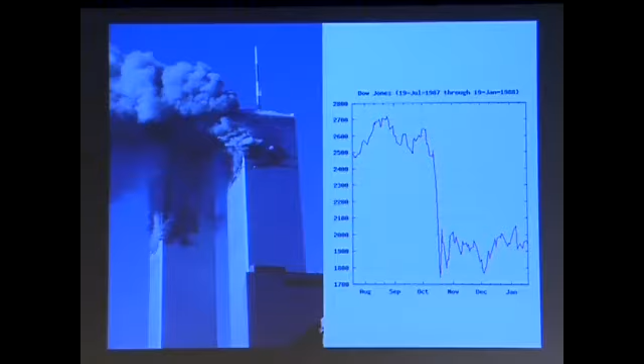Borders, limits, are a new problem that at least my generation was not concerned with, because we were concerned with embodying flows and liquid forms - Yokohama is very much a kind of exploration in that sense.

And there are other reasons why limits are becoming important. The planet - we are realizing that the planet's resources are finite. We know we are walking towards the abyss if we continue consuming the amount of energy we are consuming and producing the carbon emissions we are producing.

Most of these things are resolved, are addressed, in the problem of the envelope of the building. The envelope of the building accounts for a very large percentage of the possibilities you have to regulate the energy exchanges between the outside of the building and the inside of the building.

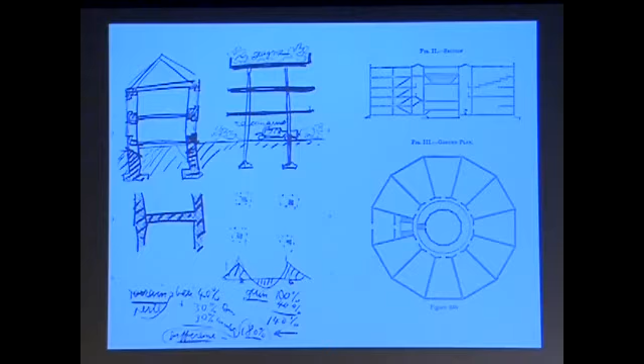I think in the next few years we probably need to bring together theories of representation and technologies of environmental performance into a new theory that can bring those two things together. And as a hypothesis, which is obviously a test, is not a finished theory.

What I am trying to do, and what I'm going to use as the backbone of the explanation of our projects, is the idea of envelopes. There has been, in the last few years, a lot of interest in the field of architecture about the surface as a problem. By talking about the envelope rather than the surface, what I'm trying to do is expand that definition.

I'm not concerned with the patterns of the surface or how to produce the patterns of the surface. I'm not concerned about the surficial effects that we can produce - we know we can produce these things.

I think what is crucial to address is the relationship between those patterns, those systems of construction, and the massing of the buildings, the aspect ratios of the building. So the theory is that we can actually draw links between the aspect ratio of an envelope, and I'm talking again as an envelope as the sum of the facades and the roof.

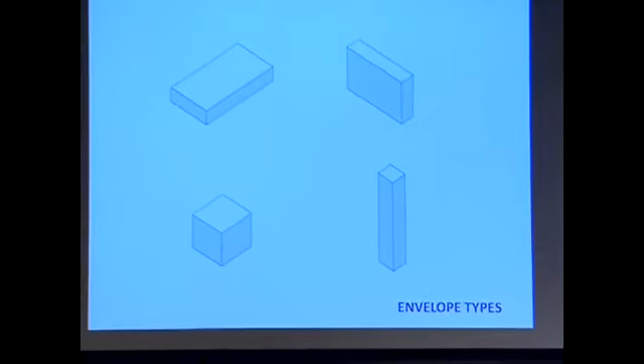So there are four types that I call flat, horizontal, and this is basically my hypothesis, and probably it's an incomplete hypothesis—it needs to be developed, but that's where I start from. There is flat horizontal envelopes, flat vertical envelopes, spherical envelopes, and vertical envelopes. Those are the four basic categories in which I'm trying to structure this theory of the building envelope, which hopefully will bring together surfacial concerns with climatic problems, with representational problems, and hopefully political opportunities.

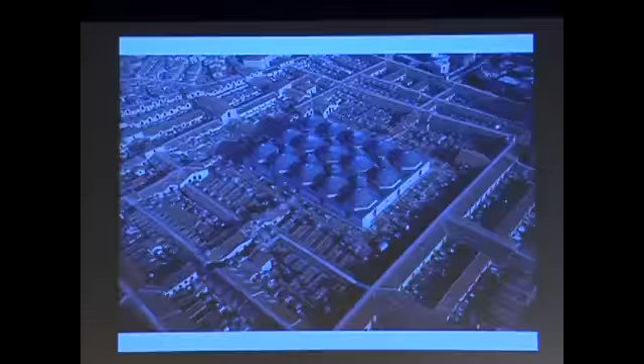So flat horizontal envelopes are envelopes like this one. They are not new in the history of architecture—they have a very long tradition, sometimes utopian. So all these buildings that contain large spaces and that basically cover a large piece of the ground also have certain interesting potentials.

The most important one is that because the roof suddenly becomes the main surface of the envelope, it needs to be articulated in such a way that regulates light and ventilation, and in some ways conditions the interior of the space. It's the roof that becomes the main device to relate outside and inside, natural and artificial.

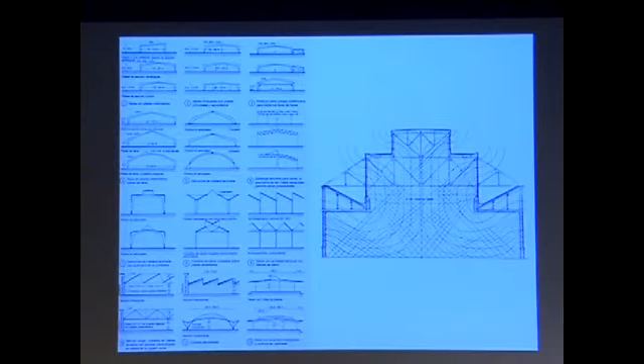What is interesting, as I think, as perhaps a political opportunity, is the fact that these buildings are usually so large that sometimes, or very often—even if in a picturesque manner—they have to decide whether nature is inside or outside.

It's very common. You go to airports, you go to shopping malls, and there is some attempt always to replicate nature inside, by putting bamboo gardens or these kinds of little demonstrations of nature that you find inside of the airport.

So the roof is making the border between the inside and the outside, but it's also making certain statements about the artificial and the natural.

And it gets even more complex when these buildings become so large and the technologies of roofing become also naturalized, that these buildings start behaving as a ground, and therefore open another political potential, which is the manipulation of the ground—the destabilization or restabilization of the ground as a political opportunity.

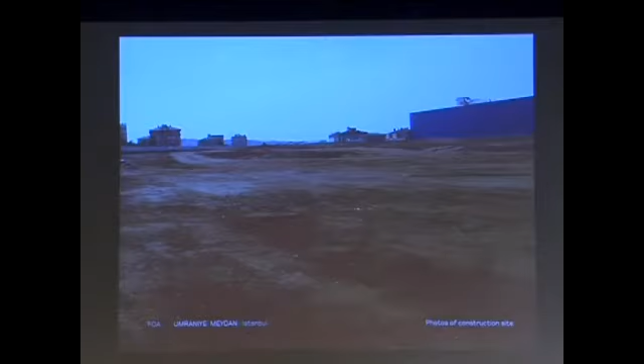What was interesting was to realize that the ground was basically clay, red earth. Then looking at old pictures of Istanbul, we realized that Istanbul is a city of green and red.

Because it's a very green city with this kind of clay ground, if we were trying to challenge the status quo of this deployed box on the land, perhaps one possibility was to use the palette of the ground, to merge the project with the ground in a way IKEA doesn't, and by doing so try to destabilize the ground, to make something new that IKEA doesn't relate to. The ground is irrelevant to them.

So here it was a problem of using the envelope to produce that new ground. We propose a green, super green building.

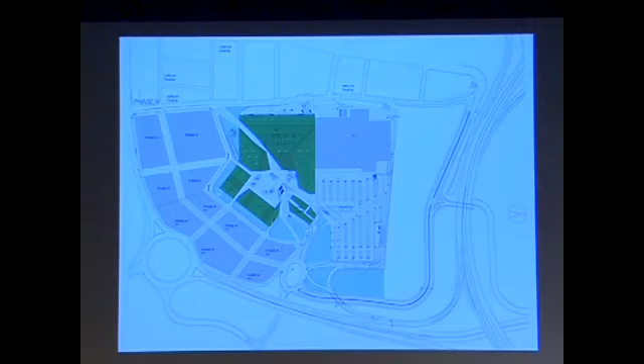We managed to convince the client to split it into pieces and have a central square inside. We use a green roof that has certain advantages in terms of thermal performance and hydraulic cycle and so on.

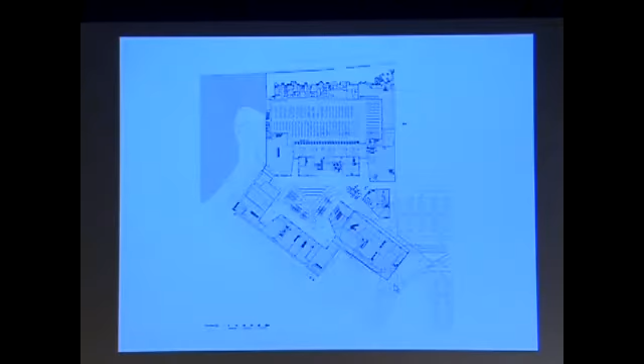The building we developed, as opposed to what IKEA does - this is IKEA, and this is our building. What we did was blend the roof and the ground and locate this central public space that, in the future, once the city grows around this currently suburban location, could become a new square for the community.

So you see the palette of materials - it's a very rough building. We had a minor engagement with the construction, but that was also part of the problem. We had to set up a very simple set of requirements that would have the effect we were trying to achieve without having to be on top of it very much.

These are some of the pictures. It's horribly built, but never mind - most of the ideas are there, even if the details are usually crap.

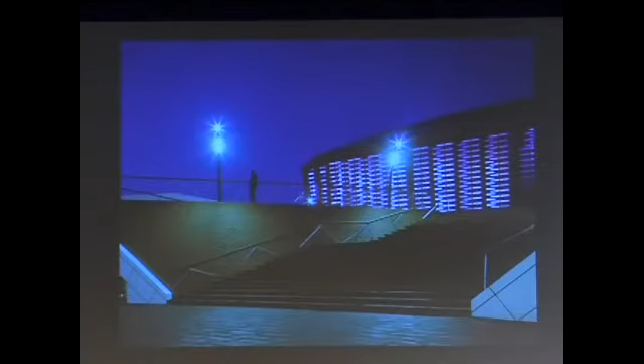I think that's also about talking about cheapness, how to operate with these cheap opportunities that I think constitute today 90% or 95% of the work architects have, and are taken as irrelevant endeavors because they're not expensive, not well considered. I think actually those are the places where we can make important differences.

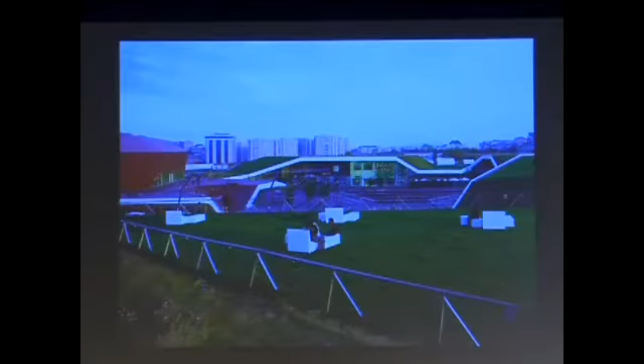Daylight and natural ventilation are used also as a way of shaping the landscape in the roof. You see this is the way the building feels - these people don't know, but they are walking on an unstable ground.

What happens inside the square is quite remarkable because suddenly it becomes a stage for different activities that are organized and supported by the developers.

Second project we are doing now is also a cheap project - the redevelopment of this building, Birmingham New Street Station. Right in the middle of Birmingham is an old building from the 70s that is being revamped now at a huge cost, £390 million.

Our commission - and that's why I say this could be a fantastic project of civic pride and all these things are obviously in the menu - the commission we get is to design the facade, to make some kind of image for a refurbishment actually being done by another architect. So from these 390 million, we have more or less 40 million, and this 40 million is where the image of the building has to be located.

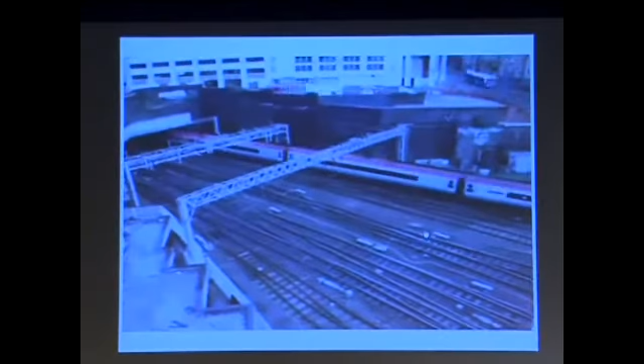It's a time to celebrate the lights, the information lights. So we basically devised this kind of quadriptych of flows happening on the site that we try to capture in this new scheme. The trains, the crowds of commuters going in and out—one of the busiest stations in Europe—the bands of information and the sky.

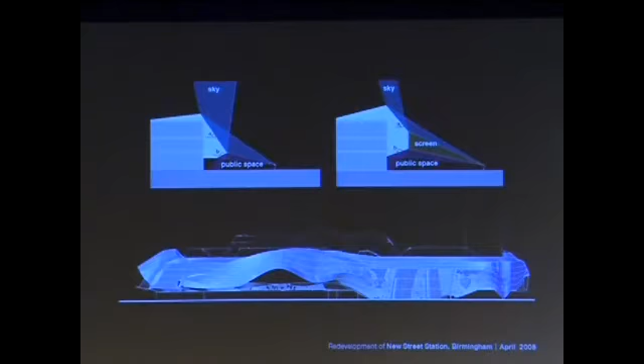And we do that by wrapping the building with a skin that is reflective and designed to reflect exactly those things—not to reflect the buildings in front, like the 70s buildings, but actually to reflect the sky, to reflect the public space, to admit the screens so that the building becomes a demonstration and a mix of all these things. We like to talk about Koyaanisqatsi—the movie where you see cars moving and clouds moving and processes happening simultaneously as a kind of demonstration of the energy of the city.

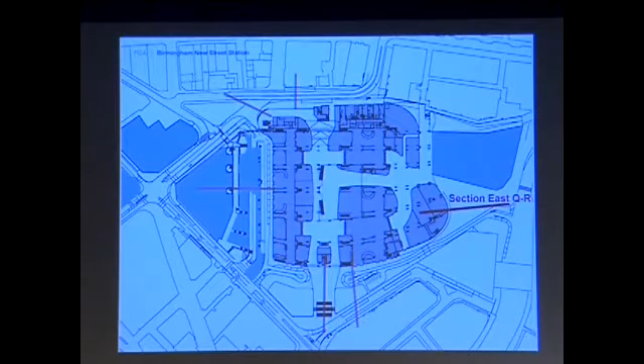So instead of looking inwards from the envelope, we looked outwards. We scanned the field around the station with a series of sections that identify the depth from which the building is seen, and you see what happens. We put the people, the different viewpoints, and we calculate the inclination of those envelopes so that we reflect exactly the things that we wanted to reflect.

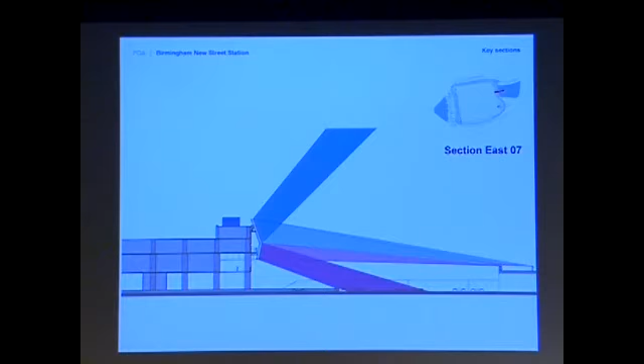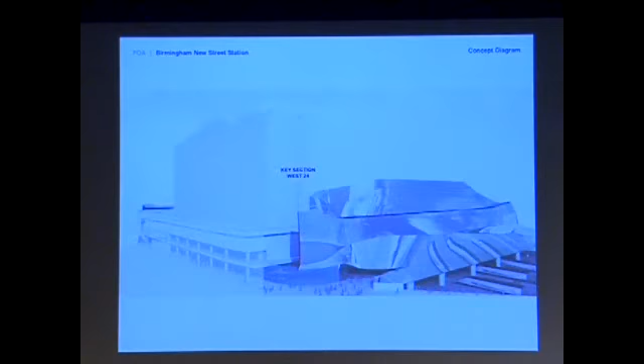So sometimes you have a very deep field, sometimes you have the trains below that you want to reflect, sometimes you have other things, and so with all these sections we just morph them, and that's what created the form of this envelope—one that is supposed to represent the station, and represent maybe Birmingham as a city with this particular past.

But it's all attached to the building. We are not looking inside, we are only looking outside. I think what is interesting about this envelope, and the cheapness in which we have to operate, is precisely that cheapness forces us to invent perhaps an alternative to more conventional types of facades.

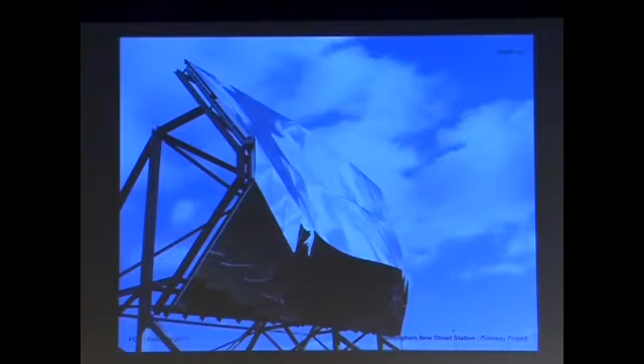This is the way—it's actually a huge thing. These are the mock-ups of the buildings. It's like 19,000 square meters of stainless steel, and this is the effect that we hope the building will have. It will be almost like a device that will enable the citizens to witness and experience the different lighting conditions or the different flows going in and out of the station through the day.

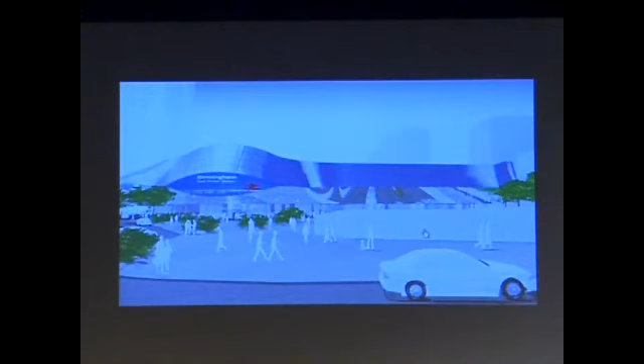Some more images about the building and an animation that tries to explain. You see, from ground level you never see the trains, but it is precisely because the facade is reflecting and pointing down that you see the trains, and you see the commuters moving, and you see the clouds moving, and you have this kind of synthesis of flows in the center of Birmingham.

I'm not going to finish this. Let's move on to the next category, which is the category of spherical buildings, trying to honor an important inspiration in this research, which is Peter Sloterdijk's trilogy of the Spheres, which I'm fortunate enough to be able to read in Spanish.

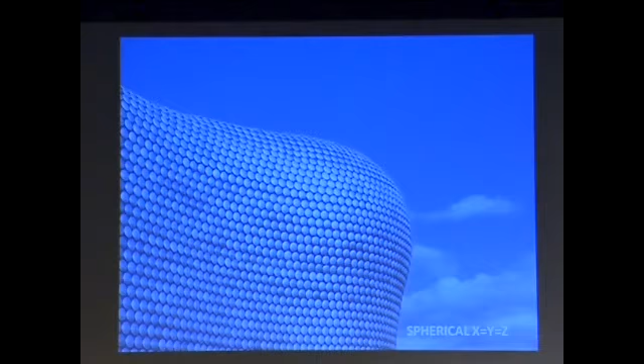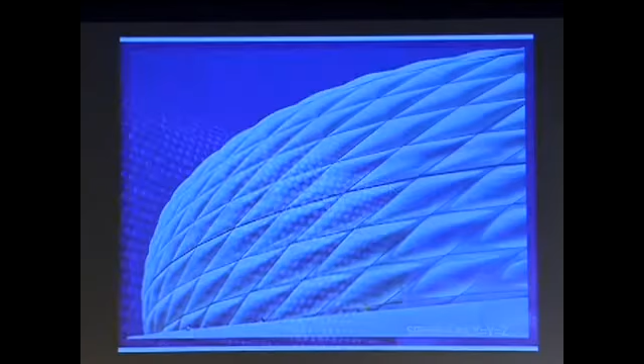So spherical buildings doesn't mean that they are spherical. It means that they have a more or less equidistant or even dimension in all aspects—so the height, the depth, and the width of the building is more or less the same. So this is a spherical building, this is a spherical building, this is a spherical building, whether you believe it or not. This is also a spherical building, in the sense I'm using the term here.

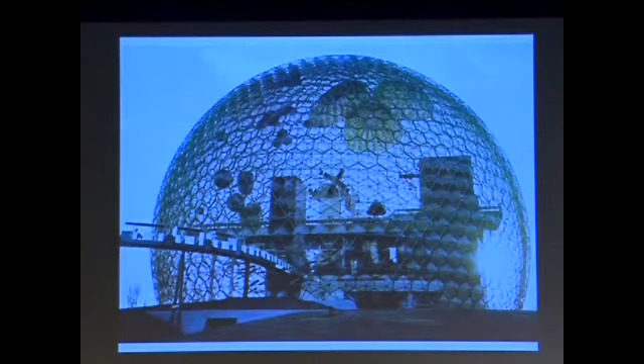And I think spherical buildings have a long tradition of engagement with the representation of political ideas or ideologies, primarily because they are buildings that are difficult to function without air conditioning. They don't ventilate, you cannot light them inside, you need to develop a kind of artificial climate inside, and that's why they became so rare, and they are often used as ways of showing utopias or worlds in themselves. Spherical buildings actually have the lowest envelope ratio of all, because a sphere contains more cubic meters per square meter of surface.

That means that in a way what happens in a building like this is that the facade is freer from any internal determinations than in other typologies, and yet they are buildings that usually have a very important iconographic content. They are public buildings. They are buildings that often mix different types of spaces. Some of them are not related to the outside. Some of them are related to the outside.

So they enable architects, they push architects to engage in a kind of experimentation that is to a degree about pure treatment of the surface. The surface is no longer a crucial climatic device, and therefore it becomes a domain for experimentation. Architects now have all kinds of CNC technologies, silk screening technologies, and casting technologies being explored in this type of buildings.

It's actually quite interesting because this is a kind of sample of all these buildings. What you see in all of them is a deliberate attempt to make differentiated patterns. So there is a certain political unconscious that happens in China, happens in Japan, and happens here in Europe that drives architects to explore this type of patterns.

That's just kind of a side comment. So, two buildings that are not that spherical, but unfortunately we used to have one spherical building, which is the Institute of Legal Medicine, but that stopped. We basically pulled out. That was too cheap to continue.

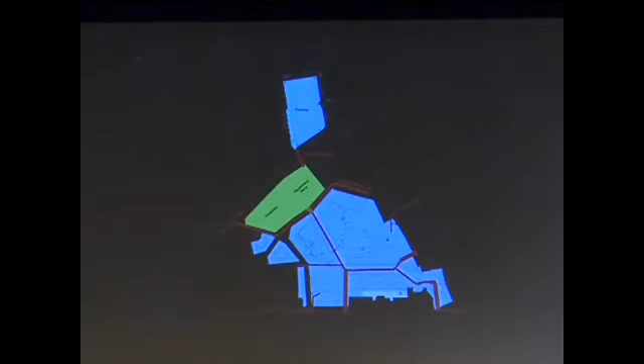So now I'm going to show two facades that are for buildings more or less within that type of envelope that enclose a space that is equidistant in all dimensions. One of them is this building, John Lewis. We had to do that project as part of a development in Leicester.

Nothing to talk about the inside. Again, cheap projects. We aren't even allowed to question how a cinema complex works or how a shopping department store works, because they know better than us how they work. So they tell us what to do, and we are left with the design of the facade as the main area of application of our discipline.

So in that situation, we again try to make that envelope attached to. Attached is a word from Bruno Latour that I like very much, especially in respect to the issue of the envelope, because the surface is by itself, but the envelope is always attached. It's attached to the outside of the building, it's attached to the inside, it's attached to cultural concerns, iconographic concerns, environmental concerns, and so on and so forth.

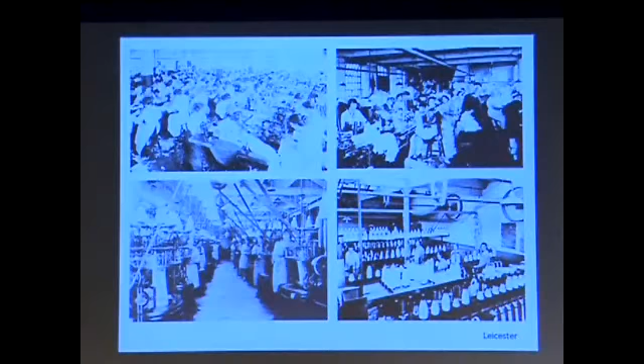So in a way, the project of the envelope is a project of being able to produce or explore expression of these attachments of the surface. In this case, Leicester is an industrial city with a huge Asian population and a tradition of this type of hosiery.

So what we proposed was to capitalize on that tradition and replace the wall of enclosure of the store with this complex skin of two layers of glass. This is actually not cheap.

But we were lucky enough that the client bought it, and so what we did was take a pattern from the archive of John Lewis, who was the final tenant for the building. We selected a pattern based on its coverage because we were interested in a certain amount of G value, shading coefficient of the facade, in order to achieve certain environmental performance. We then redrew it, in a way that by having these 8 different tiles, we can shift the transparency slightly.

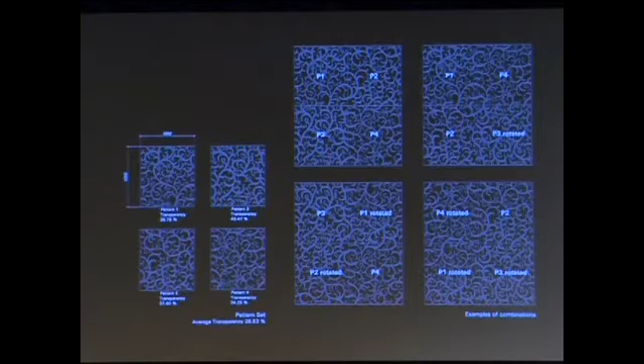So it's a pattern that appears continuous. It's actually discontinuous because there are unitized glazing systems, but by printing that pattern on the glass, we are erasing the joints and turning it into a monolith that has a differentiated pattern. If you think about that political unconscious I was mentioning before, of facades that are at once monolithic and differentiated, like in Beijing, this is part probably of that same attempt of capturing that political unconscious.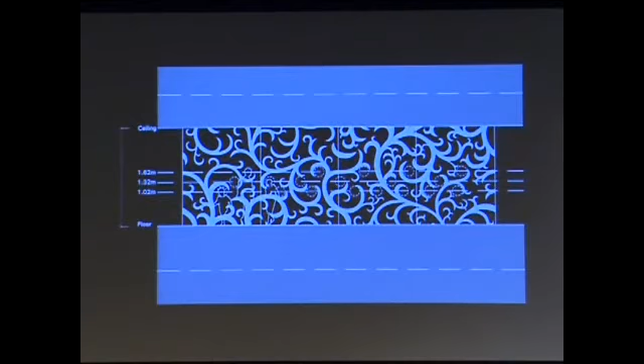So the pattern was scaled up for ergonomic reasons so that it will embrace the heads of the people inside, and because it's double, it has an interesting effect, which is that when you are inside, you see through, but when you are outside, you don't see, because the two patterns overlap. And it cuts the light also.

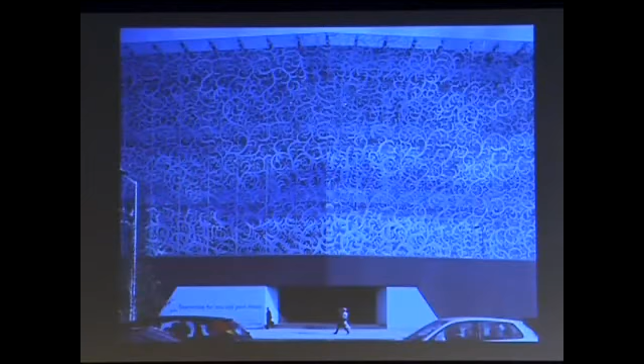Every time that the light moves diagonally through the envelope, it overlaps. Every time that the light moves horizontally, like when you are looking from inside, it's more transparent. So that is also some of the effects produced in this building.

As you can see, it picks up, sometimes reflects, because it's a reflective silk screening that we perform on the glass. It makes the divisions of the cladding disappear. It captures the light and the shadow. It makes some areas transparent and opaque, depending on how the light around the building is. It acts as a kind of Chinese lantern at night, changing colors.

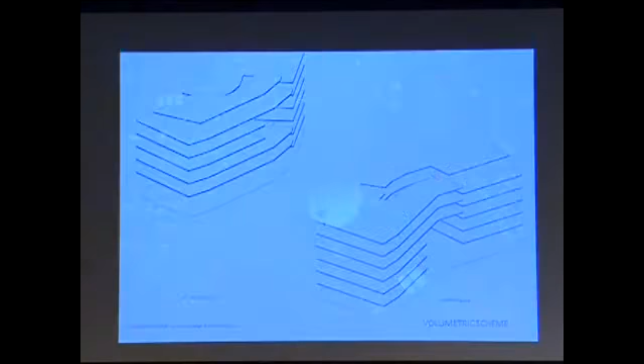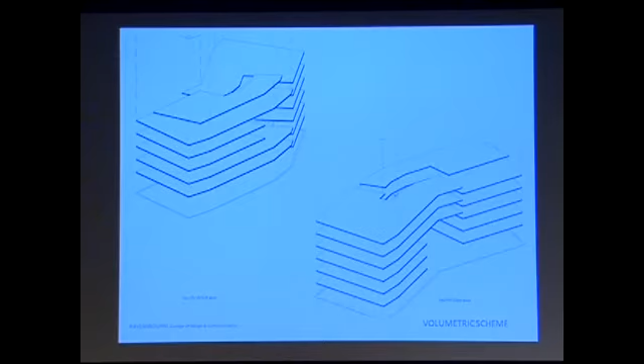There are some ideas about shifting levels that I'm not going to discuss, but what is important about this project is that we were trying to capture the identity of Ravensbourne College, which is an offspring of the arts and crafts in England, William Morris. We had to stand in front of the dome, which is a huge mass with no scale.

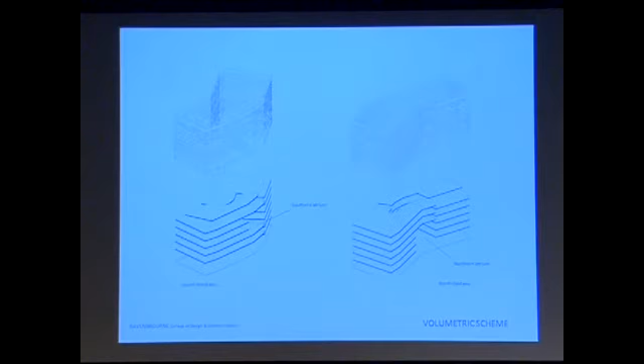So the idea was that we were going to do some sort of silo, a wallpaper silo, where, as opposed to what happens in schools, where you always see the stratification of the different floors, we were trying to destratify those floors. First, by using a system of split levels that enhances diagonal movement through the building, and then by making a pattern of perforations that turns the building into some kind of mysterious mass where you don't know any longer where the floors are located or what is happening behind.

We did that by resorting not to flowers but to tile derived from Penrose tiling, a non-periodic tiling system that uses three pieces: a triangle, a fat rhombus, and a thin rhombus. That's how they call them. That covers the surface in this way and enables us to have different sizes of perforations.

So these are different types of perforations. And then what happens, you see the split levels, you see that the floors change, and between two floors we always have two lines of windows, because when the floor changes to the split level, suddenly, that's the way in which we blur from the facade the presence of the floors that is characteristic of school typologies, forming that very abstract mass in front of the dome.

What we did here is identify the programs within that volume and also the exposure to the sun, and use that as a determination of the size of the windows used around the building, which allowed us to produce different lighting effects.

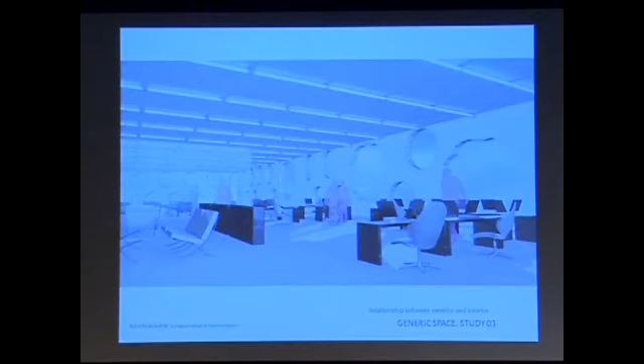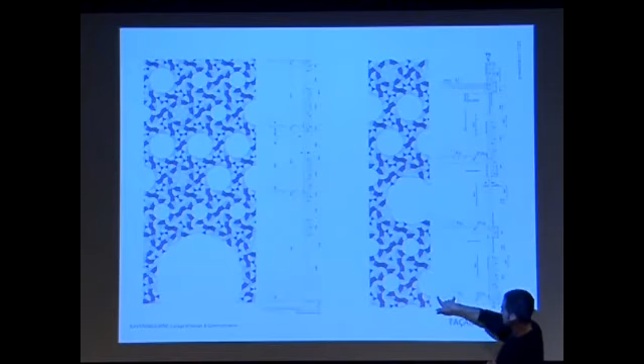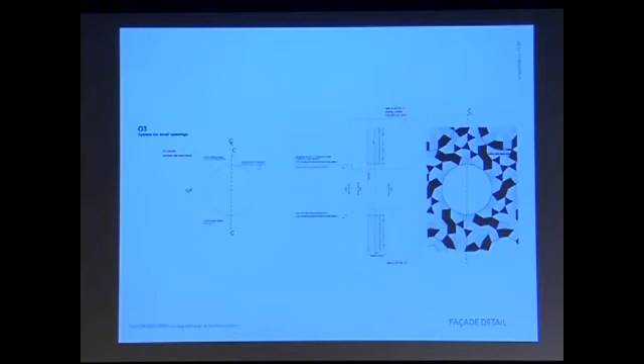And the pattern changes, as you can see, every time the perforation changes. Maybe there are better images here. You see when the perforation becomes bigger or smaller, the tiles are coded in such a way that they relate to the polar center of the array. And as things change, the pattern around these windows also varies.

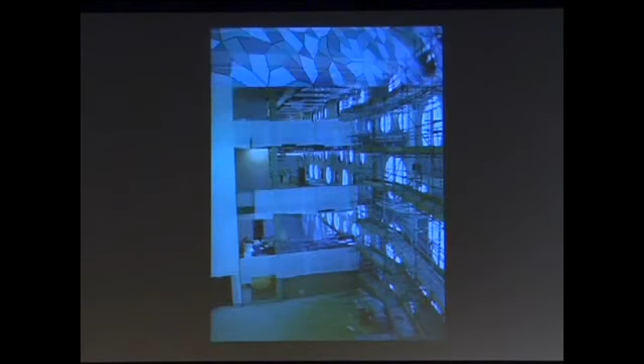So this is the facade towards the dome, and this is the building now nearly finished. You see basically how every time the window is different, what happens around the window changes automatically in color. This is the atria inside - these are the perforations of the atria and how the windows appear in those perforations.

Large facade. Flat vertical. I have two more categories.

Do I have time, or am I over the top? Okay, 45 minutes late, you said? Okay.

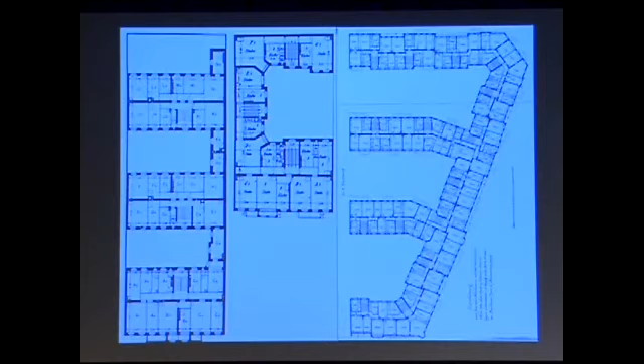Okay, flat vertical. Flat vertical typologies are what is commonly known as slabs. What is interesting about slabs is that they constitute 95% of the urban typologies built after the Enlightenment. They have an effective floor depth or bay depth that optimizes daylight and ventilation for a particular use, and then they are densified, which is why they produce slabs or bent slabs, these kinds of organizations that make up the cities where we live, as opposed to the old cities - this is a Le Corbusier drawing that talks about how those patterns of flat vertical organizations unfold into new future organizations, which I think is quite interesting to explain the concept.

One of the most important things about this typology is that it has that very important urban performance.

And this is Toulouse-le-Mirail, a city that was a major disaster in the outskirts of Toulouse by Candilis, Josic, and Woods, where you see, as opposed to what we were seeing in Barcelona or Buenos Aires, and in traditional cities.

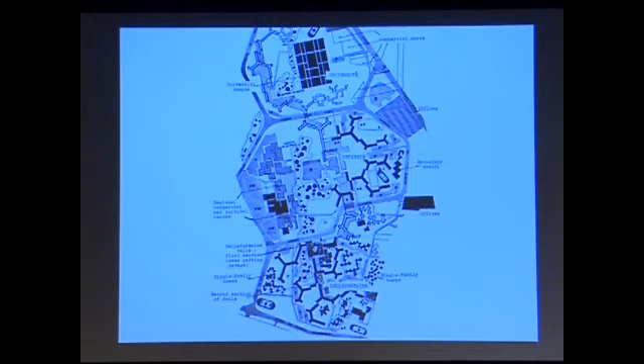The flat envelope delimits private and public. In these modern cities that Le Corbusier starts, there is no longer back or front, public or private. The ground in this kind of welfare state has become all-pervading, all public, and therefore there is no point in establishing those differentiations. And so in the way these typologies are deployed onto the ground, we can produce incredibly important effects.

There are other examples of these typologies in action that also failed, perhaps because they failed to accept something seen as anti-democratic when these things were built: that it's important that in cities, parts of the ground are private. And so in being able to establish the patterns in which we deploy these typologies to divide public and private, I think there are some of the most important potentials of these typologies.

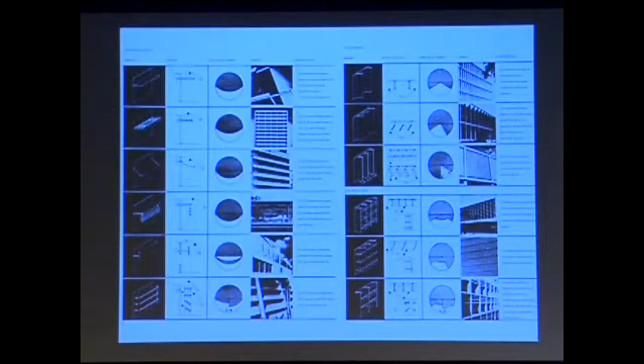The other important potential, when we talk about politics, is that in this typology, the envelope, as opposed to what was happening in the spherical types, performs very important environmental functions and very important iconographic or representational functions at the same time, and both coincide in the envelope. So shades, types of fenestration, and so on. The history of architecture is full of examples of how the flat vertical types represent cells.

Or a building built by accretion of units, as opposed to a building built by repetition of building components that gives priority to that surficial entity.

And again, we go back to contemporary attempts to deal with the problem, and you see that as opposed to these Miesian and Corbusian types in which everything was repetitive, there's now this kind of political unconscious, a contemporary political unconscious, where it's no longer possible to make a building like this. It's just politically incorrect—you're seen as a kind of fascist because you are equalizing everybody.

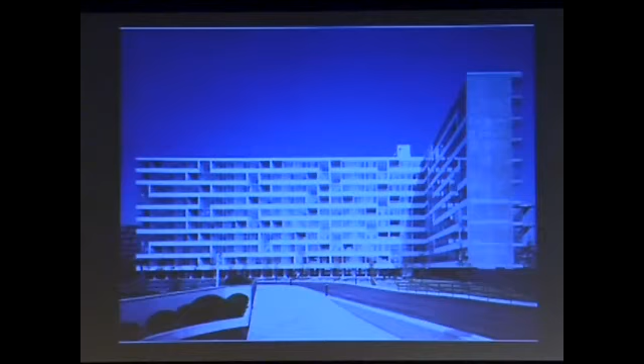So now all architects are trying to change something so that there is some kind of differentiation. The way we manage the relationship between that latent unconscious desire for differentiation as a quality we all aspire to in our contemporary societies, and how this differentiation fits into programs that are usually quite repetitive, is actually quite interesting.

So in this sense, I bring again two projects. This one was made in the outskirts of Madrid for social housing, where we were given the freedom to locate our building on that site, and there was supposed to be a park.

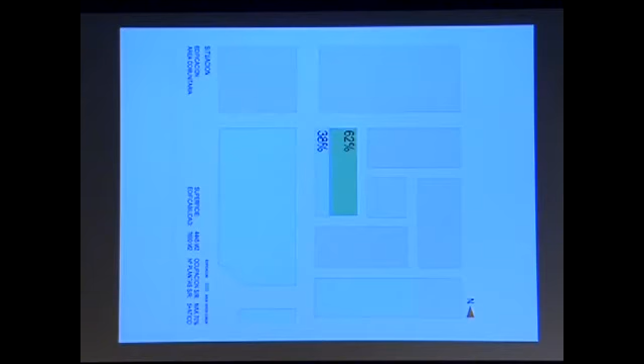So we decided to concentrate all the mass in one bay facing the park, making all the units through-units, so that on one side they look onto the park, and on the other side onto a private park that is the cover of the parking. The building was limited to a certain height, which immediately took us to a very deep building in order to host all the units on that front.

Once we did that, we realized that because we had a very low facade ratio, we could perhaps think of the possibility of making an all-glass social housing building. That was the idea we started with. But then we realized that in Madrid, with an east-west orientation, that would become an oven.

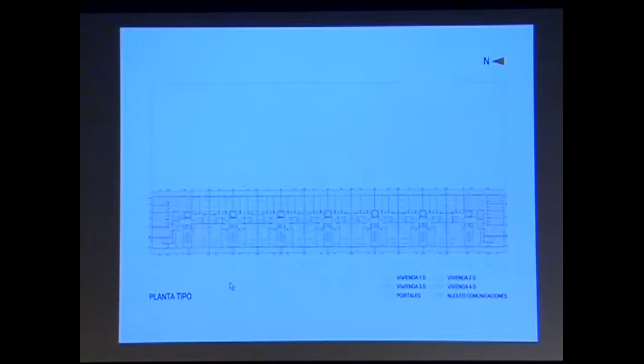So we decided to cover it with a skin containing a buffer zone of terraces. All the typologies are through-units, enjoying the private park and the public park, but also producing cross ventilation and these tubular units that have a very small facade. It's almost as if, taking a conventional social housing facade, we concentrated and packed all the windows into one area and stretched the type so that we have windows on only two sides. That's how these typologies are created—always double aspect, etc.

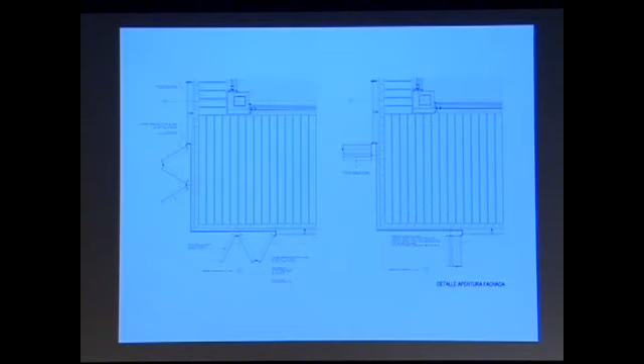And so this is the invention: a folding screen we derived from some local traditional prototypes of solar shading devices. At some point we thought it would be interesting to use bamboo, a very cheap material, instead of perforated zinc, which is what we originally thought. We convinced the client to use this. And that's how this solid block with folding screens works.

And you see the conventional typologies trying to differentiate. I think what's interesting here, or the achievement I see, is the possibility of producing that differentiation not by forcefully painting things with a different color or introducing details just to make that the expression of the building, but by using the environmental desires of the different inhabitants inside the building to produce this varying pattern—yet consistent in its nature and its detail.

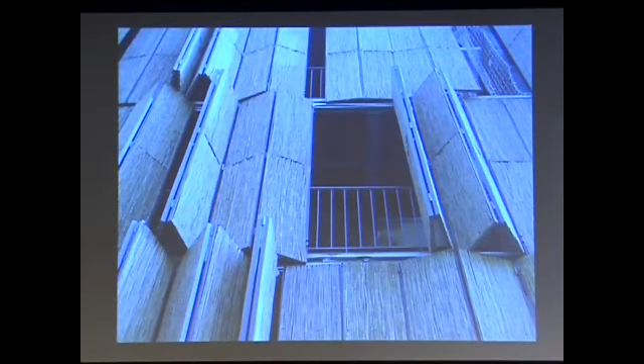This is how these galleries work when they are closed and when they are open.

Next project, also part of the kind of flat horizontal office complex in the city of London, in this location, very disorganized fabric. Basically, the client told us to make 3 central core office blocks that were limited in height by view corridors and other complex regulations that we have to endure in London.

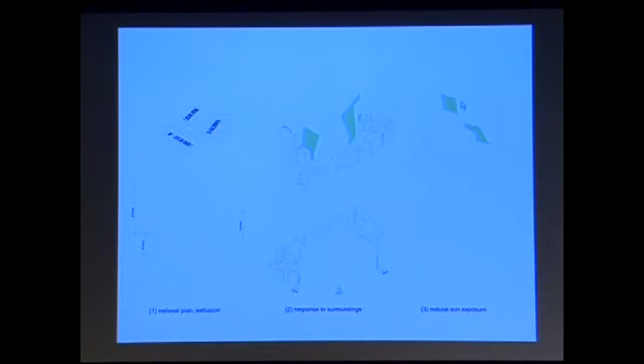This is the first default extrusion of the site into these 3 buildings, and then the chiseling of these extrusions in order to allow more daylight to the neighboring fabric or self-protect the facades to the south.

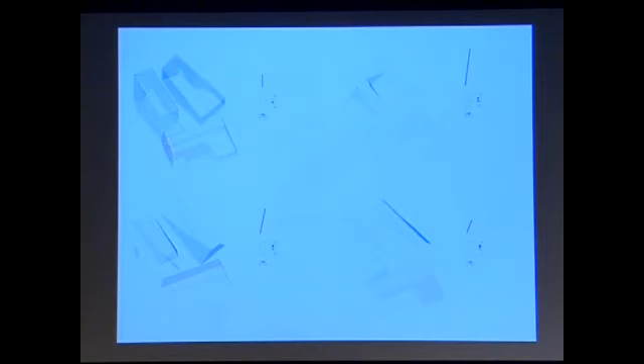A number of manipulations of those basic extrusions that we went through, and then we regulated by the fact that we knew that we needed to use a unitized glazing system or facade system to wrap those envelopes, and the possibility of making integer numbers or integer cuts of those units is what finally fixes the geometry of those envelopes that have this kind of curious gem-like quality, and that therefore we needed to build in these, these are the buildings. This is kind of totally conventional central core buildings.

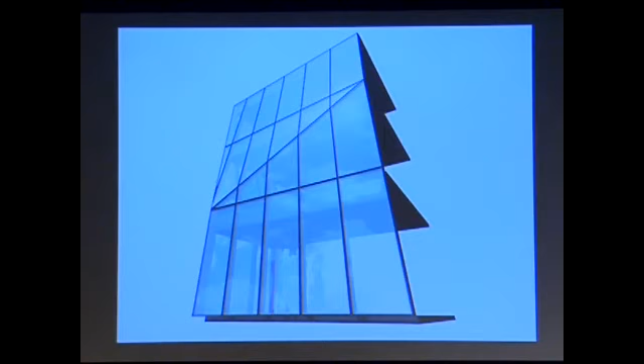But we basically needed to use glass in order to have this kind of gem-like quality, and glass has the problem that it is not very environmentally conscious and efficient, and so we started researching on how to shade the glass and use the shading, the kind of environmental performance of that facade in order to produce one of the important architectural expressions of the building.

So these surfaces, these irregular forms, were studied by our environmental engineers, and we were given different percentages of shading that we had to provide. And then with an integer number of tiles that were fritted depending on the pattern that we wanted to achieve, we could produce these gradated systems of shading around the envelopes.

This is how the buildings will look like when they come back to the market, because at the moment they are on hold.

No, sorry, there's quite an interesting animation of this, but let's move to the last typology, which is the vertical type. Vertical type is interesting, I think, in terms of political effect, because it is the typology that has the most important presence as a kind of iconography or image, but at the same time it has also the most stringent requirements.

Requirements in terms of environmental performance. These are expensive buildings that need to be very carefully measured. So at the same time, you have this incredible political opportunity to express a certain even national program, like in the case of these buildings.

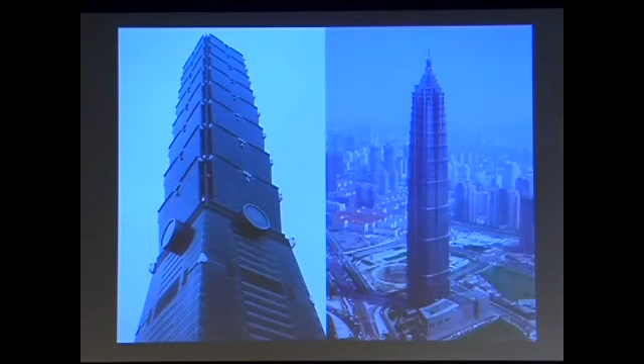The interest of Hong Kong and Southeast Asia is that culturally, climatically first, because it's a humid climate that needs ventilation, but also culturally, Asians don't like domestic spaces that do not have a very close relationship with nature, as opposed to Middle Easterners or Westerners, where high-rise living in the United States is about air conditioning and mechanical ventilation of the toilets and pressurizing of the cores and totally artificial devices that are actually keeping the building alive by consuming energy.

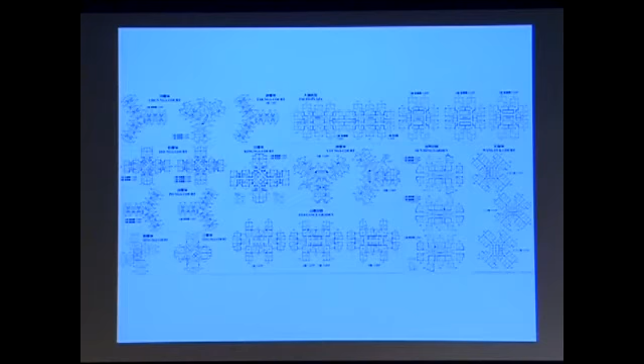So the opportunity is actually to measure that possibility of engaging nature with the building, which I think is also a very important potential of these typologies. Other possibilities: shading the outside as a determination. I think that we live in a time in which it's almost like we can do anything, and actually what we need to perhaps start to find out is what we should not do.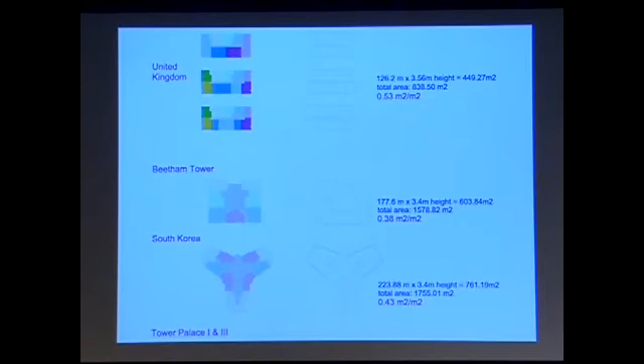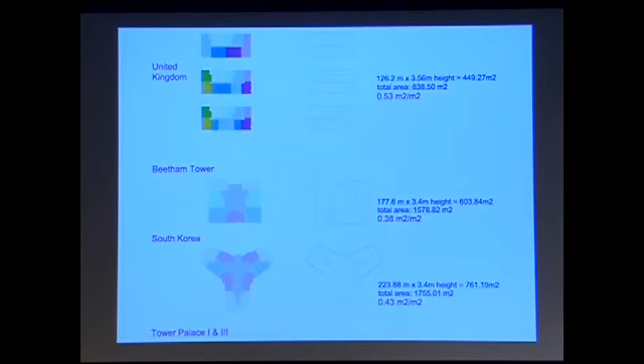This is our own research on envelope ratios, where you see buildings in Korea or buildings in the UK having ratios from 0.38 square meters to a square meter of floor, to buildings in Southeast Asia where you have 0.84 square meters per floor. That's a number developers and people in the building industry know very well. Architects know nothing, or cannot use them effectively. I think that's a type of investigation I'm particularly interested in, because these numbers express the level of artificiality of the space inside.

So, two examples. I'll quickly explain how we've explored in the past the articulation between efficiency and expression, trying to regain consistency in these typologies that are now often delivered by totally independent professionals — some people do the core, others do the layout of the floor plates, and somebody else comes and wraps it around with a funky facade. So the project I'm interested in and engaged in is resetting those attachments that will make the envelope perform again, not just as a decoration of a skin.

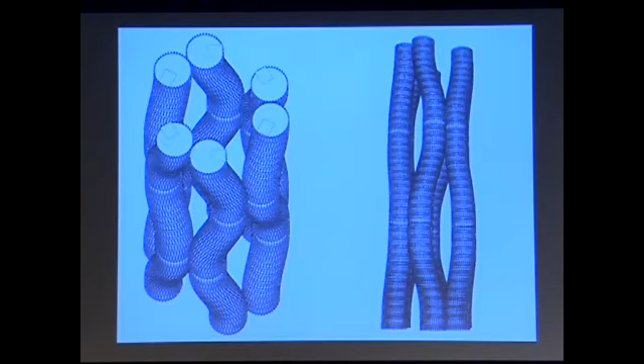World Trade Center competition — not a competition actually, it was a commission from Max Protetch — and our proposal was to split the mass of the two towers into six towers that had the size of an average lease of offices in Manhattan at the time, bending the towers so they would buttress each other, and therefore inaugurate a new typology of high-rise that, by shaping the envelope, has more capacity to keep growing higher and also produce certain lobby effects.

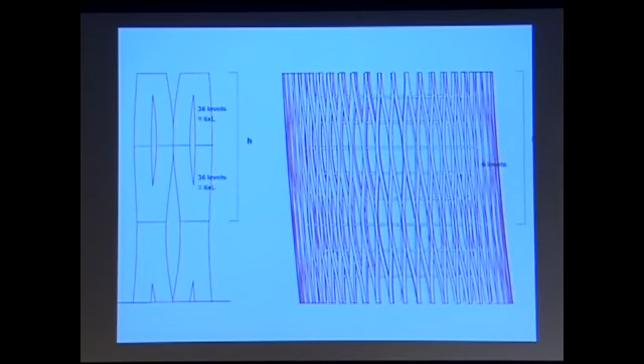But in a way, it's a kind of envelope used in this case for structural efficiency, while at the same time resonating with certain messages that were very much part of what had to be communicated in these projects. These images of people building together something, almost physically, were very much part of the iconography that had to resonate with those structural concerns.

The last project is on hold now, but hopefully restarting soon, in KL — a commercial cheap project again. What's interesting about this project, and perhaps I should have brought others, but there were too many, is that towers are the envelopes most exposed or most affected by solar radiation, because they have a huge surface hit by the sun constantly. Probably flat horizontal surfaces have a similar effect.

What was interesting about this project was that we were working at the equator, and when you work at the equator, it's hot and you don't want the sun — the sun is moving right above you. As opposed to what happens in the northern or southern hemisphere where the sun moves around, at the equator it moves above, and you don't want the sun. So what ends up happening — this is the solar diagram.

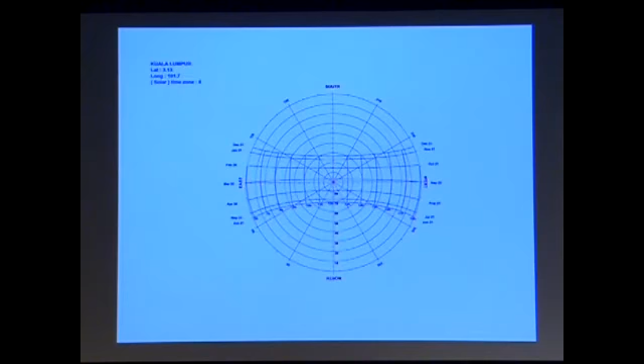This is very disorganized, sorry — there are some slides missing here. These buildings are basic, I don't know whether there's a plan of the buildings. So what ends up happening is that you want buildings oriented north-south, as opposed to what happens when you work in the northern or southern hemispheres, where you want the mass to be more compact, more concentrated, and hopefully oriented to the south.

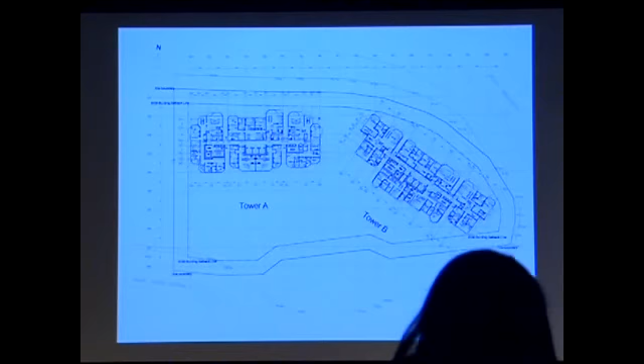So we developed these typologies — relatively, or very, conventional typologies in KL — with the parameters of providing daylight and ventilation to every one of the units, and therefore this labyrinthic type of corrugation of the facade is the direct product of addressing those environmental concerns.

But you can see, for example, that the core is open — it's not pressurized, not ventilated, not conditioned, and therefore it doesn't consume energy. The higher capital costs that buildings with a more complex facade have, compared to simpler facades, can actually produce lower maintenance and more efficient energy management for the building.

And that's the type of shading, self-shading devices, canopies that are designed in terms of the orientation of the face, but also in terms of the function of the room they are protecting. That became the language that produces the expression of the building.

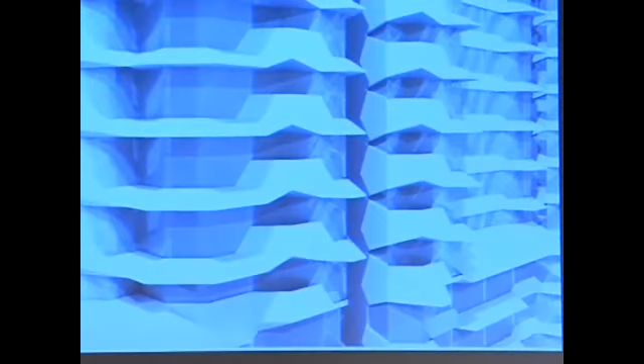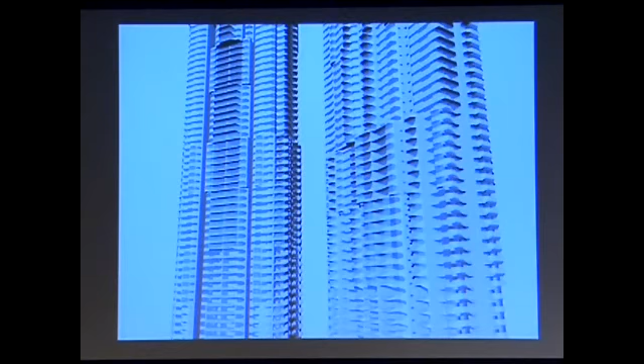So that's a detail of how that facade will be built, and these effects of changing in the section — I didn't explain it, but it was at the beginning in a disorganized way. The section, the types of apartments change. So, again, that ambition of a differentiated but consistent expression of the community inhabiting the building is also very much part of this project.

As I said before, I think I had more projects, but I've told you enough for you to understand what this project of the envelope is. I thank you for your patience, and if you want to ask questions, I'm very happy to answer them. Thank you.

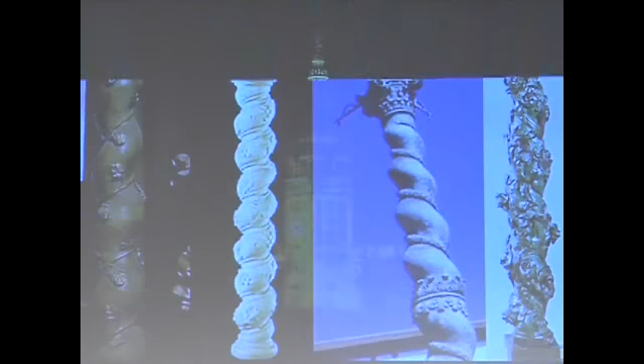So we were told to locate that building in this place. You don't see it there, but there's absolutely no reason why you'd put a 50-story building there—financially it made no sense whatsoever. But that was the commission: put a 50-story building in the Isla de la Cartuja, because the mayor wanted to say he'd built the tallest building in Seville, and that Seville is a modern city.

So, silhouette. We started investigating silhouettes constantly—when you make that kind of statement and want to relate to the city, you need to say whatever building is there is going to be the new essence of Seville. So we went into iconographic investigations of patterns: brick, flamenco dancing, curves.

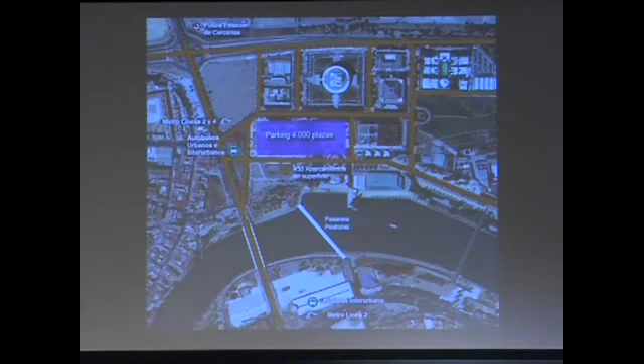We ended up designing a building that tried to create a moving silhouette by rotating a diamond-shaped plan. It was essentially a conventional office building that we distorted, while preserving most of the efficient qualities of space, mediating between these diamonds—that's basically what the plans do.

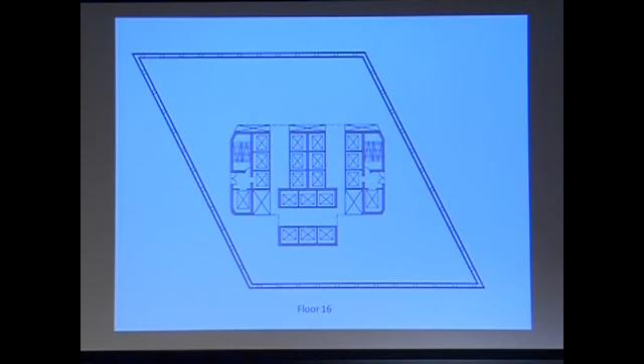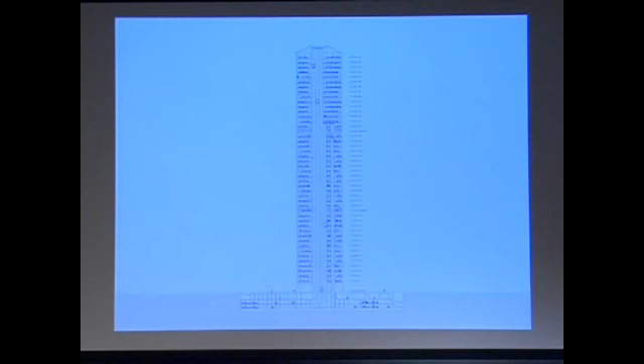You're seeing it as if going up the lift through the 50 stories, and the silhouette ends up like a kind of dancer—unstable, covered with tiles referencing local cultural traditions. I completely agree that the envelope here is formed by taking those plans, a derivation of a conventional office plan, and doing something with them to produce effects of dynamism and instability—like the pattern of dancers' polka dot dresses and the tiling.

So all these things have to do with conveying, in this case, an image—I don't know if it's an effect. It's more of an iconography, perhaps. There's an effect, perhaps, in the silhouette, but there's also an iconography in the use of tiles, the polka dot dresses, and the lattices typical of Moorish architecture.

Anyway, an opportunity to see another project.